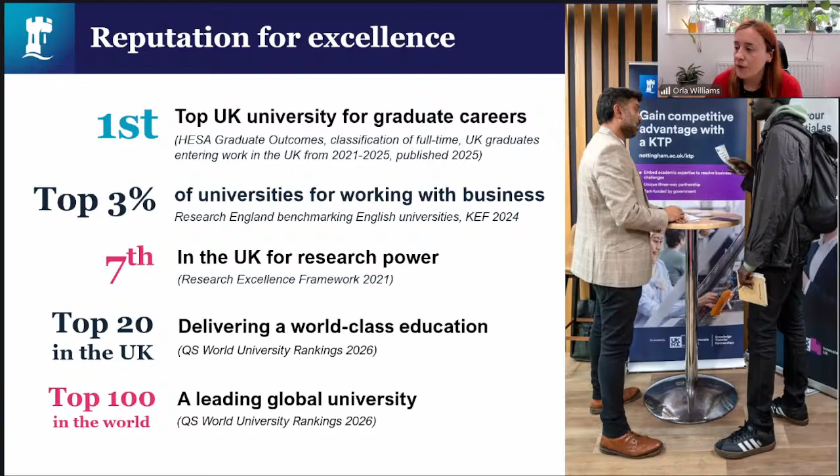We have quite an extensive history of milling at the University of Nottingham. This primarily comes from coal research. Nottingham is a very coal area, we had a lot of coal-fired power stations in this region, and there were a lot of coal mines in this area. This meant the university did a lot of coal research since its founding in 1948. However, since coal is no longer being used in the UK for power generation and our steel industry has declined, we are now focusing more on researching low carbon fuels and moving away from coal dependent technologies.

We have extensive milling facilities for material processing at the Faculty of Engineering, and we recently received a large donation of milling equipment from Uniper. Uniper is the company that owned Ratcliffe-on-Soar coal-fired power station, which you can see here on the right.

This was the last coal-fired power station that operated in the UK, and it shut in 2024. However, there are other coal-fired power stations, for instance Drax and Lynemouth, which have been converted to use biomass. A lot of the research we've done over the last 25 years has been looking at moving from coal to biomass, understanding what that change in material means for reusing existing equipment, what modifications need to be done, and how those challenges can be overcome.

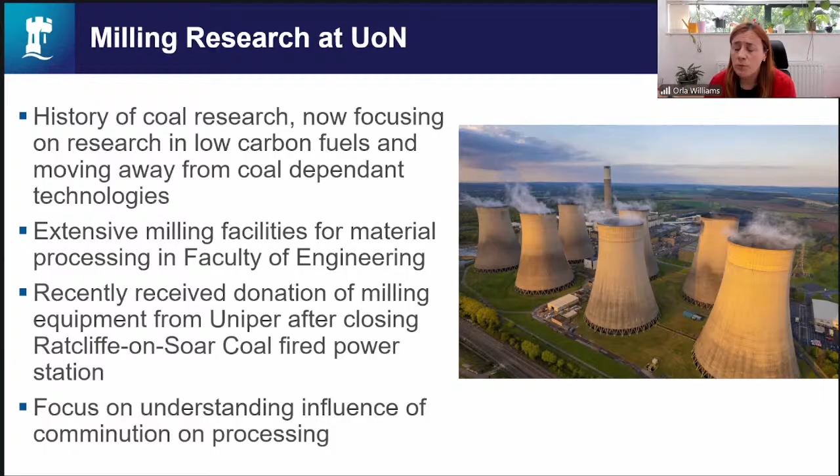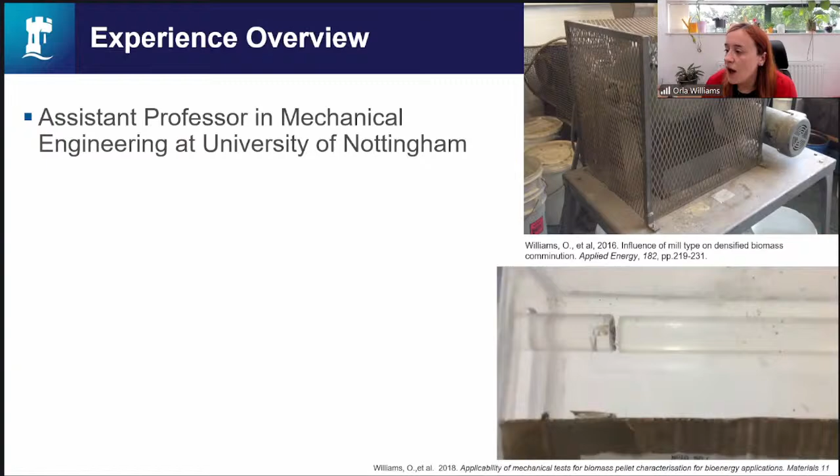So we focus on understanding the influence of comminution on different processing techniques. My own personal experience - I'm an assistant professor in mechanical engineering at the University of Nottingham, but I work closely with our chemical engineering department. My PhD itself was on biomass milling for power generation, trying to understand how different types of biomass break down in different types of mill.

As you can see from the video on the bottom right, this is from something called a split Hopkinson bar, which is used to calculate the dynamic stress and strain of materials. What you have is basically a gun launched by compressed air, and we have perspex bars with strain gauges on either side that measure the impact of the material - the strain, the transfer of energy - and from that you can work out stress, strain, and Young's modulus.

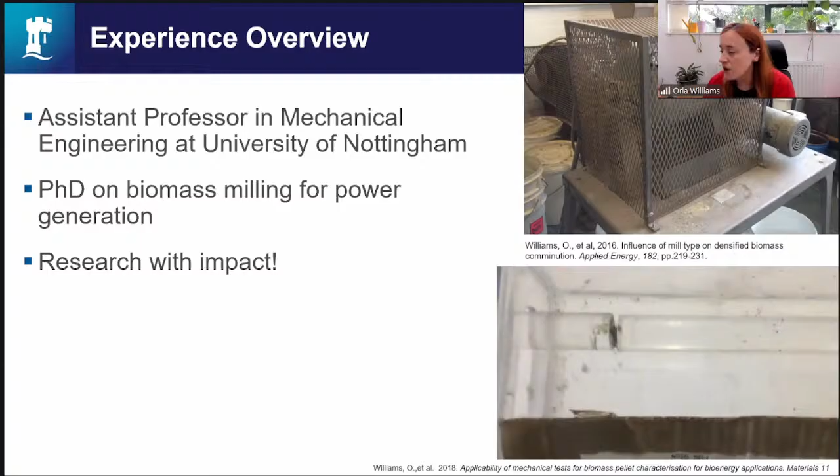This gives us information on what happens during impact collisions at high speed, which relates towards milling. So we also do extensive work with industry on milling to address their issues. We work a lot with power generators to understand new fuels they're looking at and how they behave compared to what they currently use, focusing on greater understanding of milling processes and linking those back to material properties.

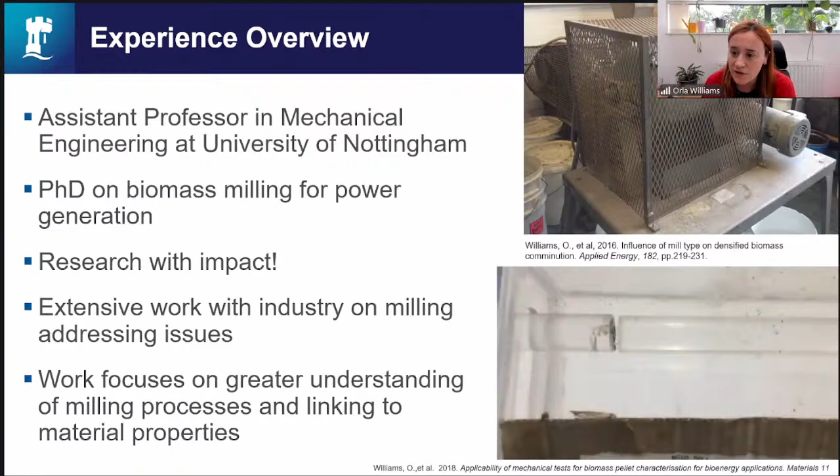So current milling processes are very, very energy intensive. On the right we have two mills from coal-fired power stations in the UK. What we have is a tube and ball mill here at the top - that's probably the closest to the planetary ball mills we see a lot in mechanochemistry. And at the bottom we have what's called a ring and roller mill, a ball and race, and that's from Drax.

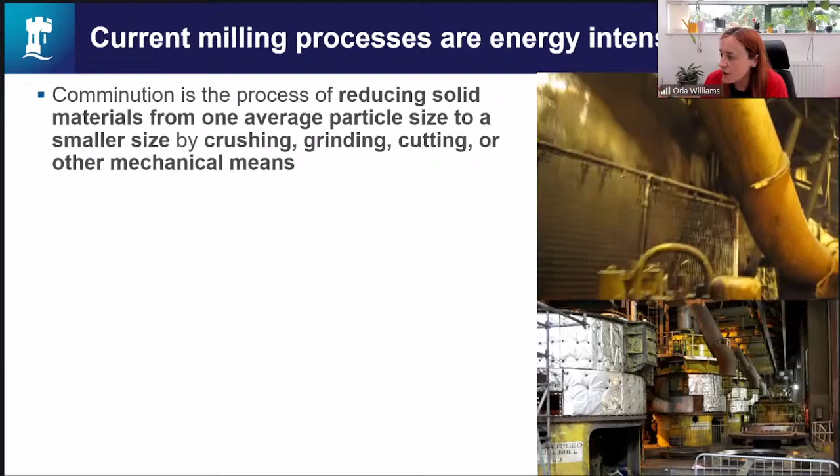Now these are continuous throughput mills at scale. They can get through a huge amount of tonnage per day of different materials - they're continuously inputting and outputting the materials. The process they're trying to do is comminution, which is reducing solid materials from one average size to a smaller size by crushing, grinding, cutting, or other mechanical means.

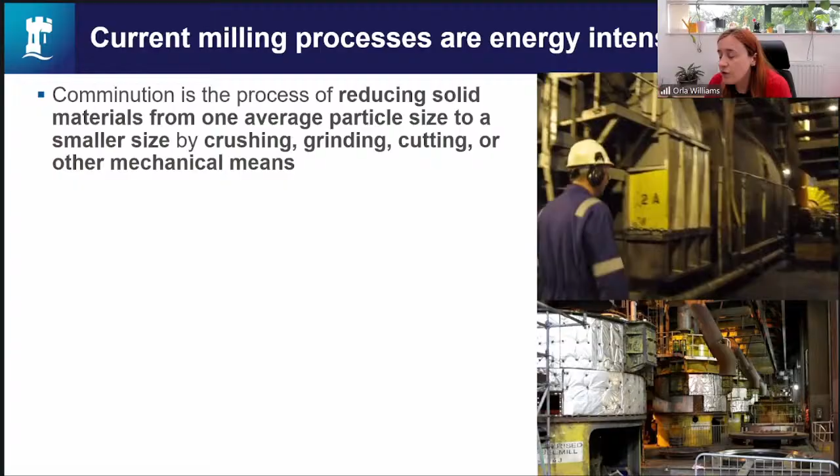Milling accounts for 2 to 3% of total worldwide energy consumption - I think it's currently one of the biggest for any one process in the world, only recently overtaken by data centers for AI. But comminution accounts for around 50 to 70% of the energy used in material and mineral processing. When looking at full-scale operations, minimizing this milling energy has a real impact on the economic viability of using different fuels.

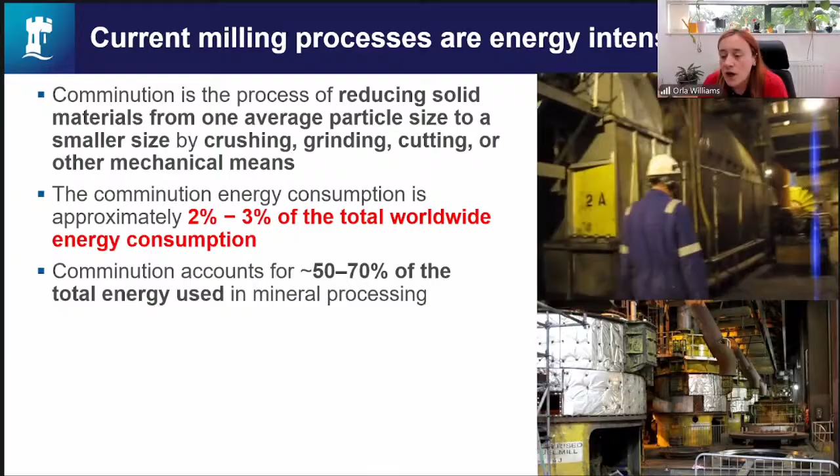If the energy you consume is 2 or 3% of the energy within the material, then it's a poor option. So if there are ways of reducing that energy consumption, it means you can make that material more economically viable for different applications.

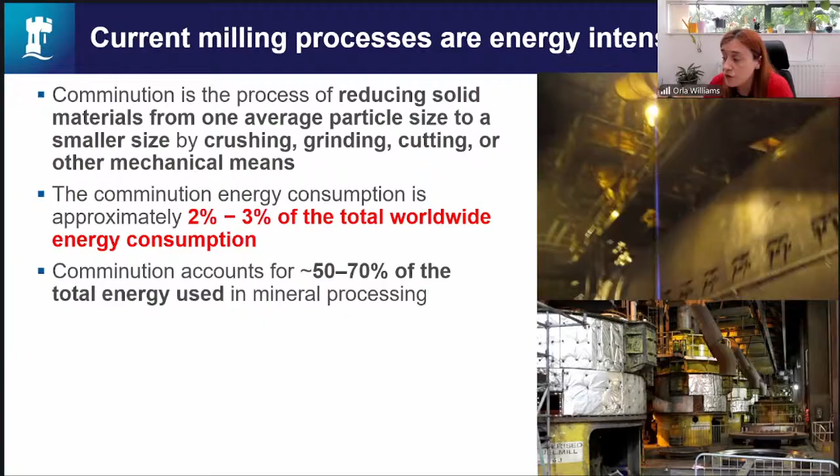To give you an idea about bioenergy in particular, it provided around 15% of all the UK's electricity in 2024. This primarily comes from Drax, which is the largest power station in Europe. They have, I think, 600 megawatt boilers, and 4 of them have been converted to run at 100% biomass - that's 2 gigawatts of power.

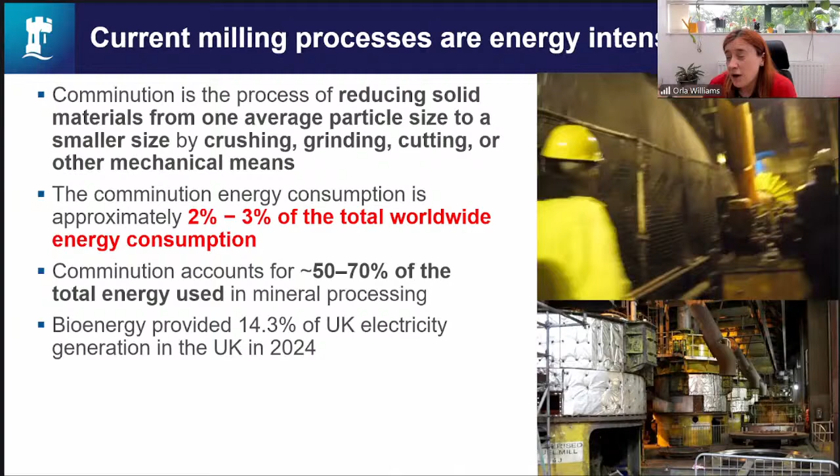They use over 8 million tons of wood pellets a year in pulverized fuel combustion, so that 8 million tons of wood all needs to be milled into a fine powder for combustion. This is around 20% of the global wood pellet supply going to one power station. They're actually one of the world's largest producers of pellets now, as well as the largest consumers. But you can see, optimizing this process is vital to the viability of these plants.

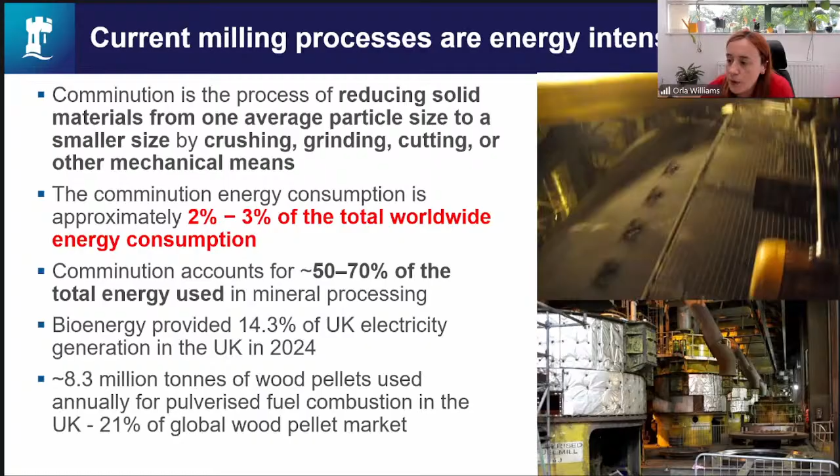So what happens in these mills? This is what's called a ring and roller mill, from West Burton Power Station, which used different types of biomass and coal. You can see here what we have is the rollers at the base, and there's like a flat plate here, and these turn and roll around. We also have incoming air at the bottom that will lift the particles up through the mill and out.

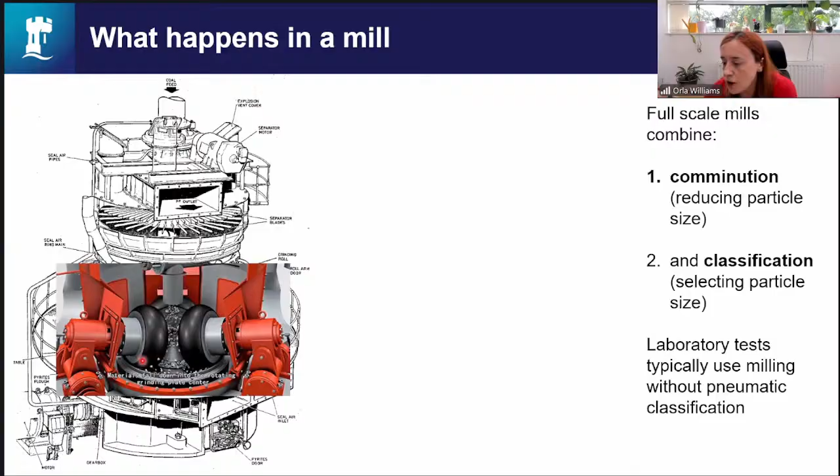So we can see a little animation of it here. We have the actual coal or your material falling into the mill. It's too heavy to be raised at the moment, so it goes under the roller, it gets crushed and reduced in size. Once it's the right size, the air will use, based on Archimedes' principle of buoyancy, lift it up through this. This is actually a dynamic classifier, and that will take it away to the boilers.

Now, full-scale mills, for these purposes, combine two processes, not just milling, but also classification. So they reduce the particle size, but then they also select the particle size when it's the right size to leave the mill. Laboratory tests that characterize these mills usually only look at the milling part with a set particle size. They don't often include the pneumatic classification, and this can lead to misleading results, particularly for new materials.

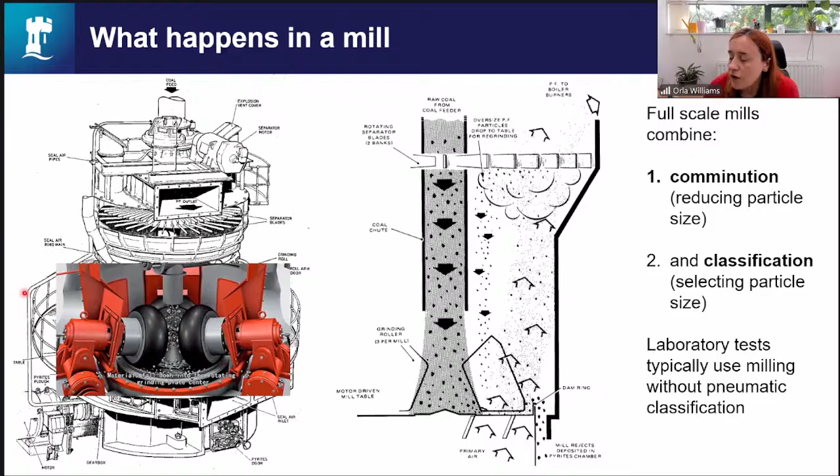So one of the main issues seen in full-scale mills is something called mill choking. Now, this is your typical materials that are used for bioenergy. We've got olive cake up here, a residue from olive oil pressing. There are large amounts of this waste in Africa, the Middle East, and in Spain and Greece. This is one of the ones that was most used for combustion in the UK over the last 20 years.

We then have two here, which are sort of thermally treated biomasses. The top one is microwave torrefied, meaning it's been cooked in an inert atmosphere to remove the volatiles. That's called almost like a coalification of the biomass, where you're trying to make its properties more like coal, one reason being to improve its grindability. This one at the bottom is a steam exploded pellet from a company called Zilkha, an American company. I don't believe they're still going, but this was of a lot of interest to power generators about 15 years ago.

On the left here we have coal. This is called La Loma, a low NOx coal from Colombia. This was favored in Western Europe because there was a big drive in the 90s to reduce nitrogen oxide emissions from power stations due to acid rain. A side effect of reducing NOx was also reducing carbon emissions, so that's why our carbon emissions reduced a lot, was actually to reduce the NOx. So this is very popular, but it's very expensive. But it is a very good grinding coal.

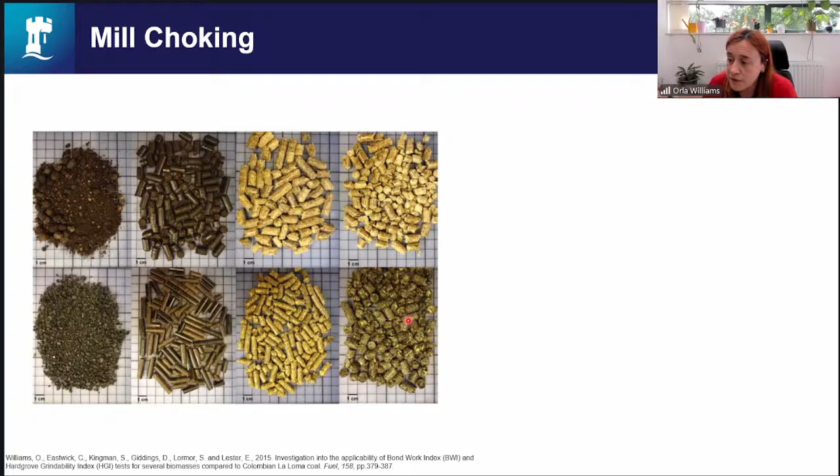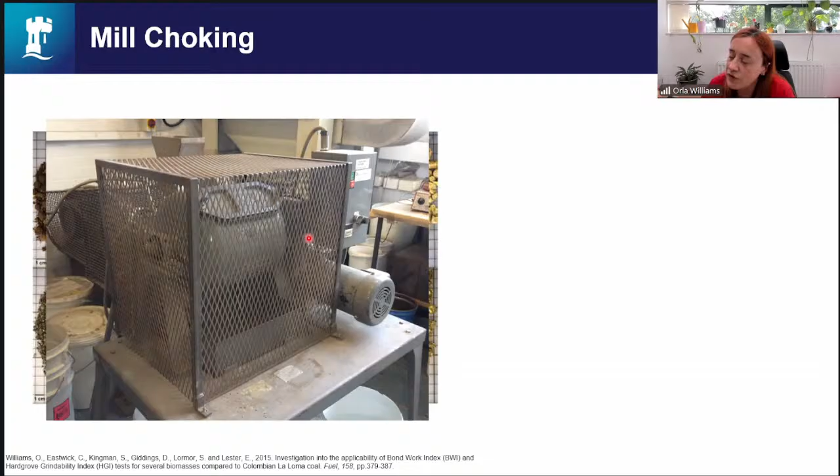But the test basically works by looking at how many revolutions it takes to go from your pre-milled size to a target particle size. What you should see is for a good material, it will break down quite easily and you'll get settled to a constant revolution quite quickly. This is what happens with the La Loma coal that we did.

So you can see here we've got two axes. We've got the mass retained on the sieves, we've got the revolution counts, and then we've got the blue line, which is the actual revolutions for each run that were calculated to be needed to get to the target size. We then have the purple line, the mass above 1 millimeter. We have the green line, the mass between 90 microns and 1 millimeter, and then the red line is the mass below 90 microns.

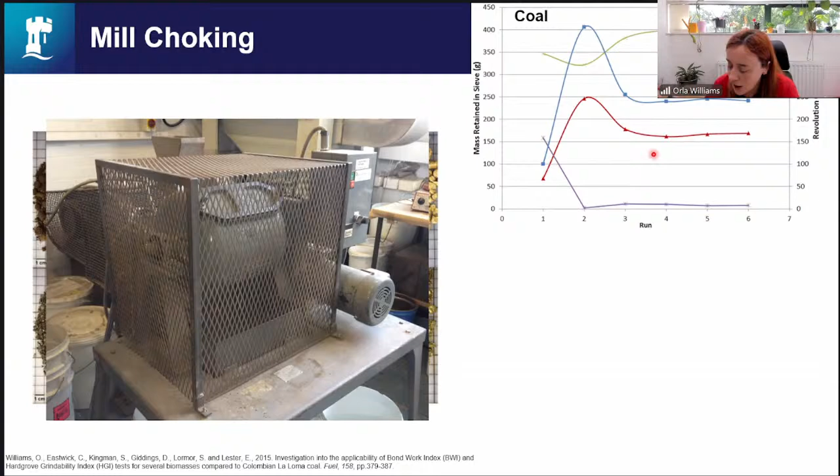So the target size we had for this test for coal was 90 microns. You could see after the first run, by run 3, we can see it settling into a pattern of around 250 revolutions, and we've got a significant amount of the material in the sub 90 micron category. However, when we look at the wood pellets, we see a different pattern emerging.

We can see that the rev count continues to increase, and it increases sharply. It's already at 2,000 revolutions by run 3 in comparison to 250 for the coal. And it keeps rising upwards on this line.

It takes about half an hour to run 2,000 revolutions, by the way, in this mill. So you can see it's running for quite a long period.

If you think about relating this to a full-scale mill, that means material isn't leaving the mill quickly. So you're adding more and more material into the mill, but it's got a very low output compared to the input. This is called mill choking. The mill is filling up because the material isn't leaving, as it's not reducing in size enough.

The target we had for this was 1 millimeter. It wasn't 90 microns, it was 1 millimeter, so an order of magnitude larger than what we had for the coal. However, as you can see, it's not really reducing in size very much. It's struggling to get there. So this shows that there's something happening in the mill that's stopping that process.

It's stopping the material reducing to the size it needs, and to have the input and output mass flow rates be the same. So this is obviously relevant to when you're scaling up any lab scale milling.

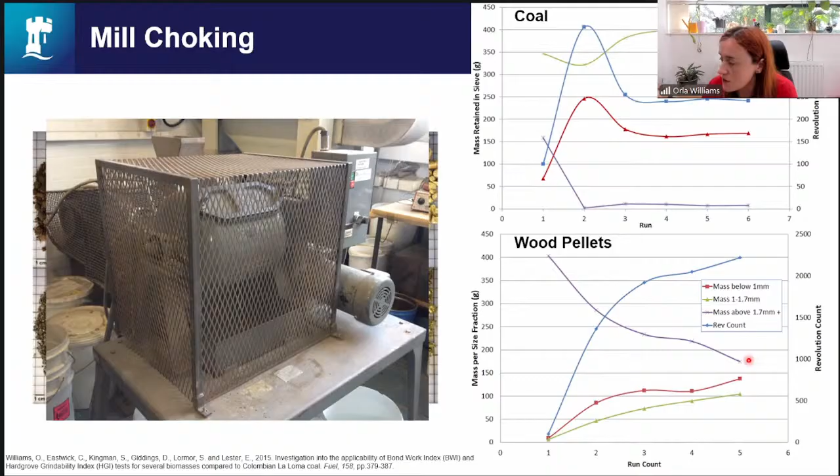So for the biomass pellets, we decided to look more into what was actually happening in terms of the material itself. When we look at combustion, the residence time in a boiler is set by the Stokes number, and anyone who does CFD will have heard of Navier-Stokes.

The particle size is selected by something called the Stokes number, which is given here. This is called the cut size, and it relates to the right size to give you the right residence time within the boiler, so your classifier is set up to give you the right residence time. It's a relationship that relates density to diameter, to the speed of its flowing, and some other material characteristics.

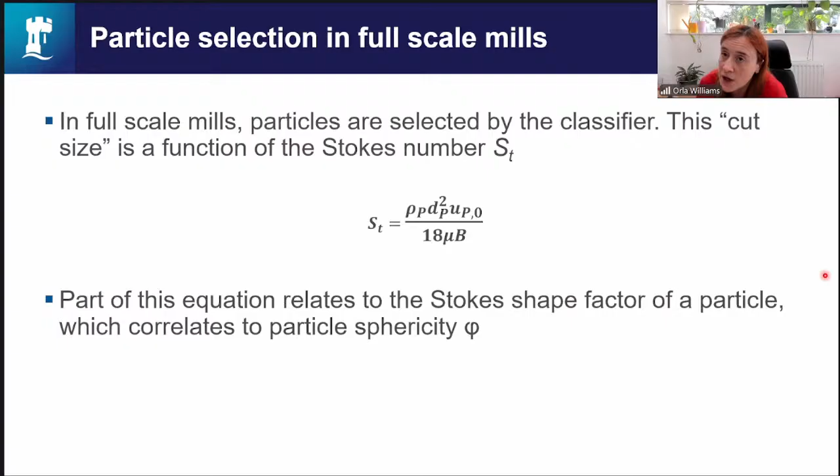Part of this equation relates to something called the shape factor of a particle. So it's not just about its size and its density, it's also about its particle sphericity. This is its three-dimensional sphericity, not its two-dimensional sphericity, which can be quite tricky to measure.

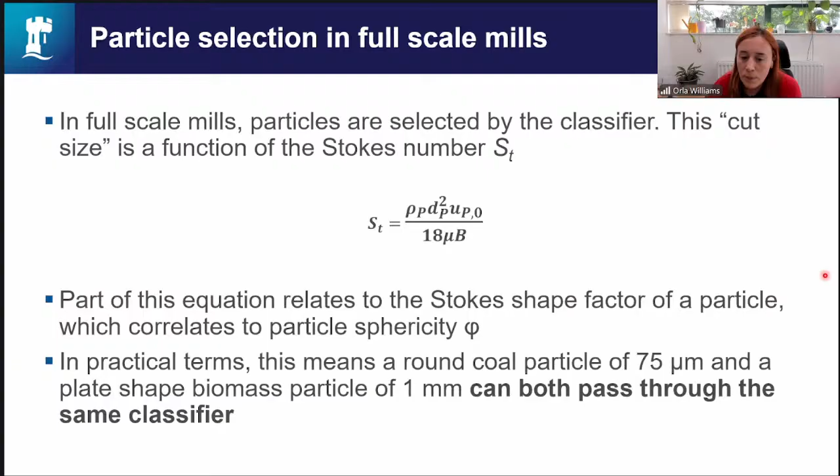But what we see in mill choking is even when the particle size is set to 1 millimeter, the particles are struggling to get out of the mill.

So all materials have something known as a critical particle size for comminution by brittle fracture. When you're in your PhD, you might get asked, 'What's the most important paper you came across during your PhD?' For me, it was this one here by Kendall in 1979, because once you've gone past this critical particle size, materials go from being brittle, where you can use impact to overcome brittle fractures, to ductile.

And therefore, those impact fracture mechanisms no longer work effectively. You don't have a fracture mechanism system to take advantage of to break down the material easily.

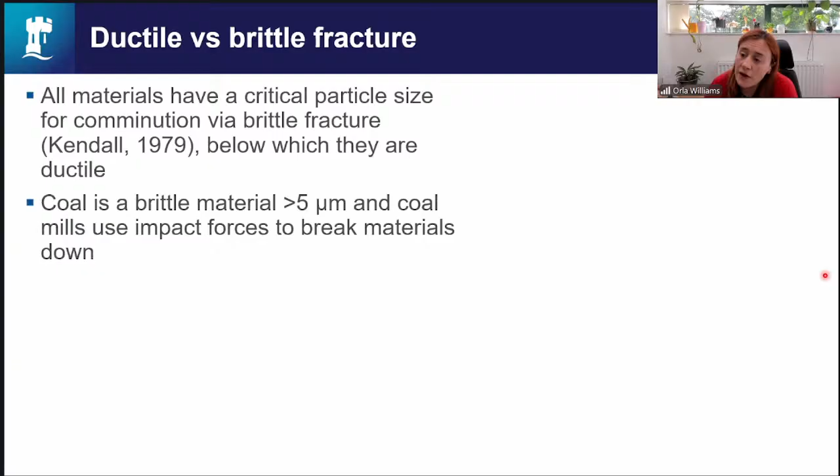Now, Kendall showed that for coal, this critical particle size was 5 microns. And given that the target for coal is that 70% of the coal should be below 75 microns, you are very far away from that brittle critical size.

However, for biomass, this has not been measured, and power generation generally uses a target of 80% of the biomass below 1 millimeter. However, we can see from our testing in the bond work index mill, the mills are struggling to reach that size. This implies that the critical particle size for biomass is above that target, between 1 to 2 millimeters.

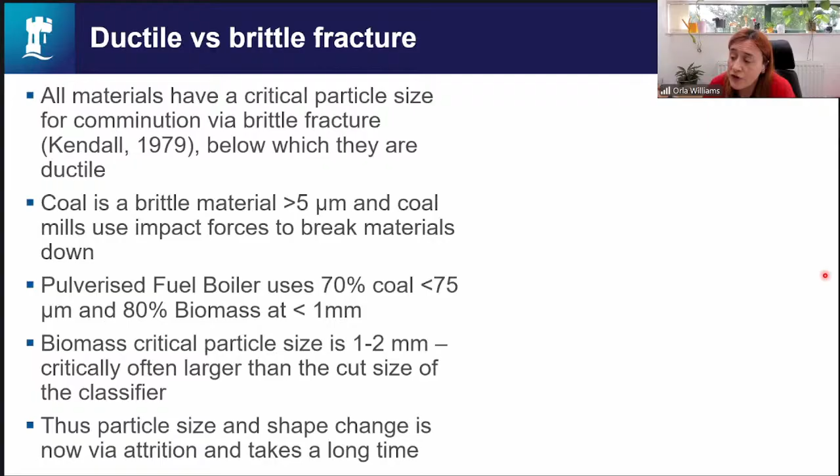So you're trying to get the mill to do something. It's a fracture mechanism type of mill, but it's trying to break down a material that is not going to do that. That means you're continuously using impact, but not getting that breakdown of the material. So the particle size and shape change now only happens through attrition rather than impact and brittle fracture, and this takes a long time to happen.

Because if you think about it, if you have a particle and you're using attrition or abrasion to reduce it, what's happening is you're just chipping off little bits on the edge. That makes the particle more and more round, which helps with the shape factor, but it takes a long time to achieve. Whereas for coal, you have this fracturing - you hit it and instantly get this sort of explosive breakdown.

So this is where you have this difference between compression fracture and shear fracture coming into play. And it's very much horses for courses - is the milling method you're using, if you're trying to get particle breakdown, the right one, the most effective one for that material? Because compression and impact is best for brittle materials like coal, whereas shear forces, so cutting and hammer mills, are better for biomass because they behave like ductile materials.

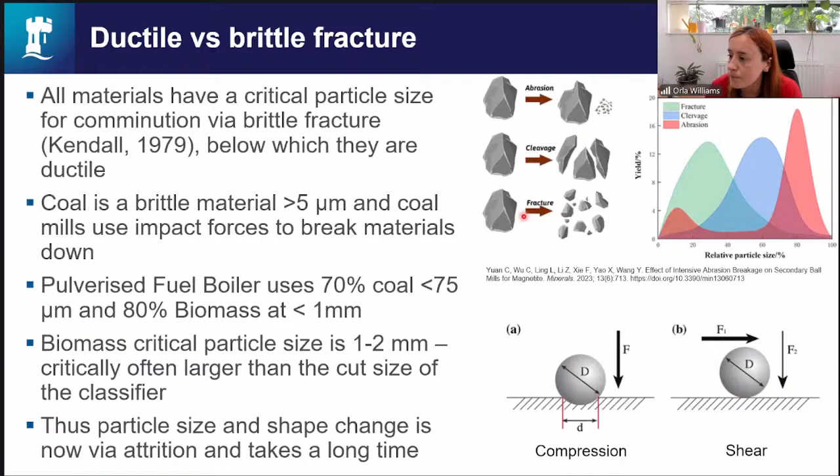So to go a little bit further into this, one of the things power generators and industry really like is metrics. They like if you can consolidate everything into a number that you can then rank things against. They obviously like to know the specifics behind that, but it really helps them with their decision making if you can quantify your work into simple communicatable ideas.

So to help with this, one of the things we started to look at is the milling theory behind mills and linking this energy and the particle size reduction together. There are 3 main milling work indices, and they are all derived from the general comminution energy equation, which was proposed by Walker back in 1937. And what we have here...

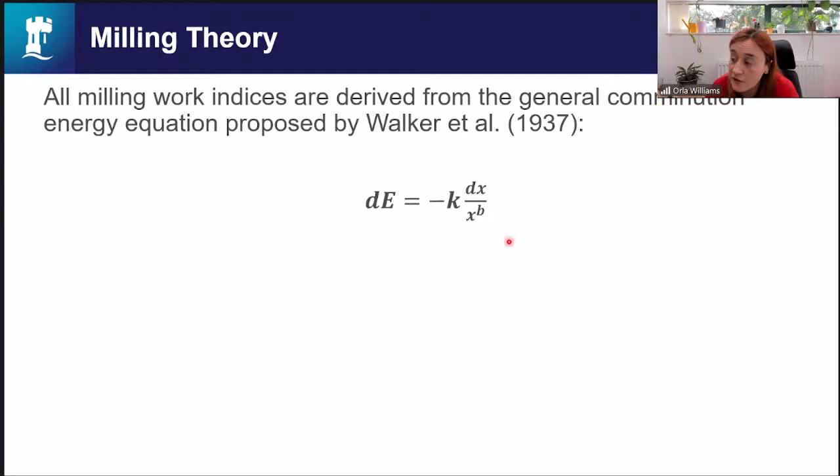...is we have the specific effective energy, so that's in kilowatt hours per ton - the energy it took to mill that material for the amount you put in. We have K, which is a material constant. We have dx, which is change in particle size, and your particle size to the power of b. Now b is related to the mill that you have, and there are 3 different b values, and they go with these 3 laws of milling.

So we have Kick's law, where the b value is 1, and this shows that energy is proportional to the log of the size reduction ratio. This is best fitted to coarse crushing, so jaw crushers, roll crushers and so forth. We then have Rittinger's law from 1867, which has been around for a while, and that relates energy to the increase in surface area. That's most applicable to vertical spindle mills and hammer mills and relates to fine grinding.

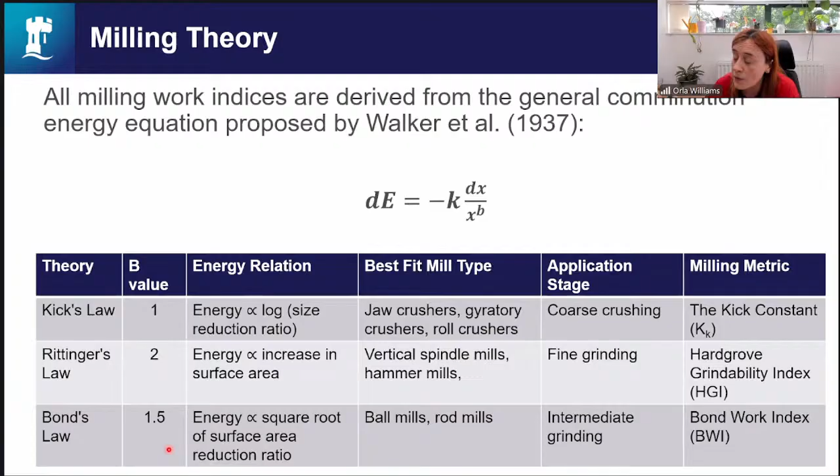This Hardgrove grindability index is another standard test that's used for coal. Then we have Bond's work index, which has a b value of 1.5, and that shows the energy is proportional to the square root of the surface area reduction ratio. This applies mainly to tube and ball mills and rod mills, so this is intermediate grinding. But as I've shown, these type of mills are also used a lot in power stations for breaking down coal.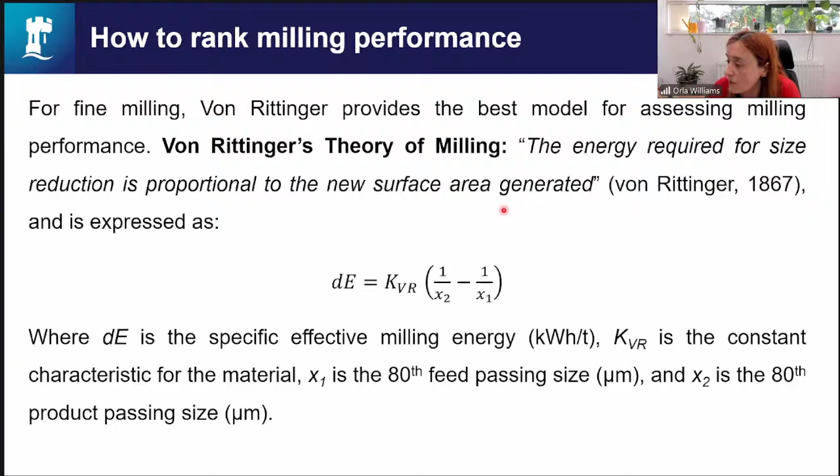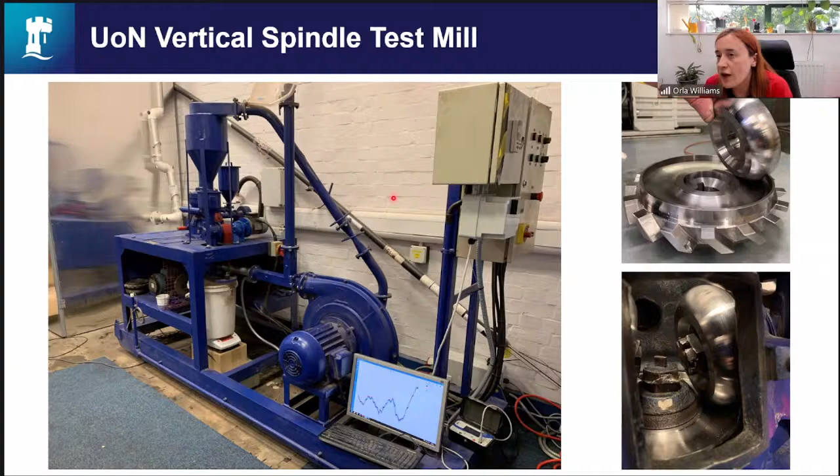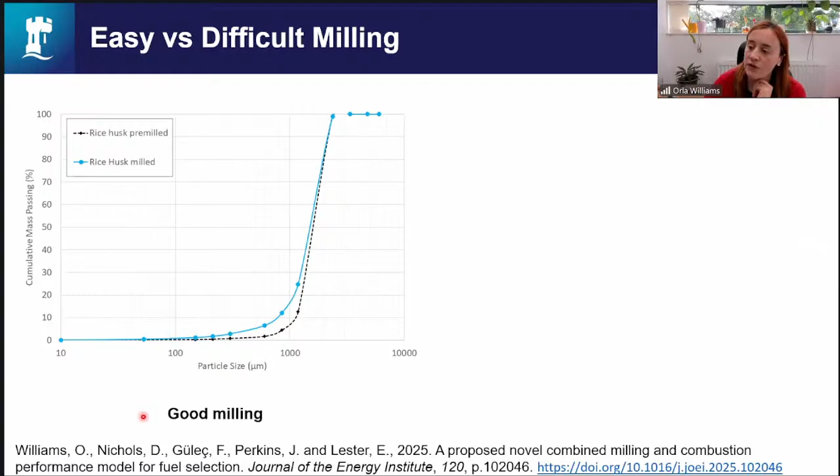So this is a replica, as I mentioned, of Drax. We did a lot of work with Drax looking at different types of fuels they might be interested in. For instance, they were interested in rice husk as an agricultural residue. Rice husk was great because you put it into the mill and it just came straight out. This shows the benefit of having an input feed that's the right size, shape and density - it just goes straight through the mill. You basically don't need to mill this, and it shows it there.

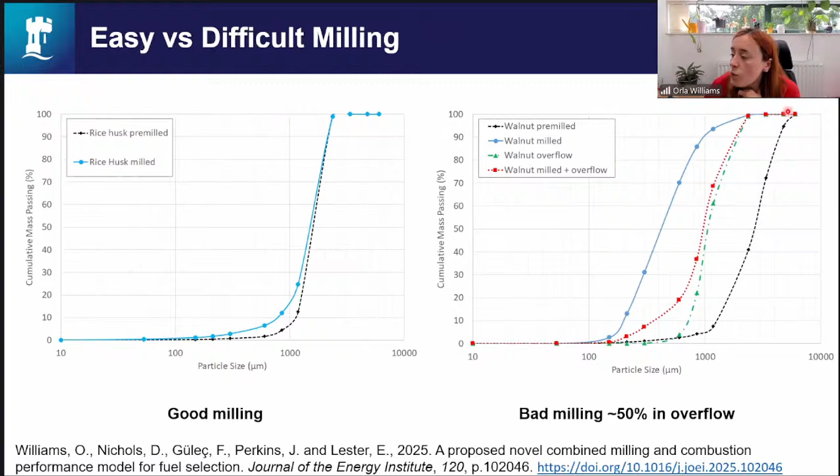So we use this for ranking our different types of materials, and I'll come to that in a second. But if we look at the same material in different types of mills, we can see this issue of mill choking a bit as well, and we can see the attrition actually taking effect.

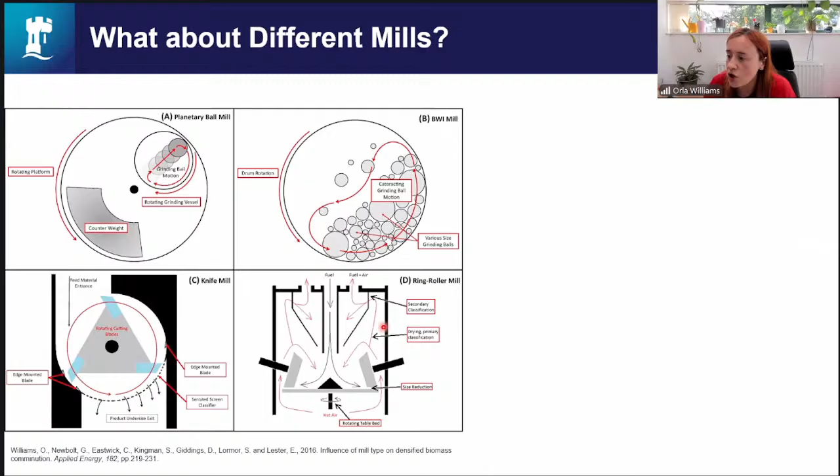When we do them, what we did was we used a piece of software from Retsch called a Camsizer, which is a particle imaging software. It's non-destructive, so you can pass your particles through. It will take images with a high-speed camera, and it looks at the particle size and shape, and it actually gives you the 3-dimensional sphericity.

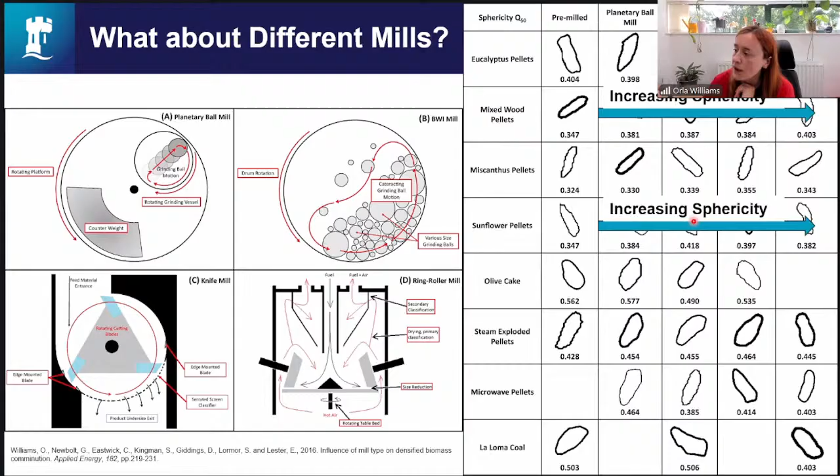So when we look at using von Rittinger, we can take the energy and the particle size reduction ratio to give us a specific von Rittinger rating for each material. What you see is that it gives you a combined metric. So some materials might not have a huge energy consumption, like the walnut, but its particle size reduction wasn't very good either, so that influences its ranking.

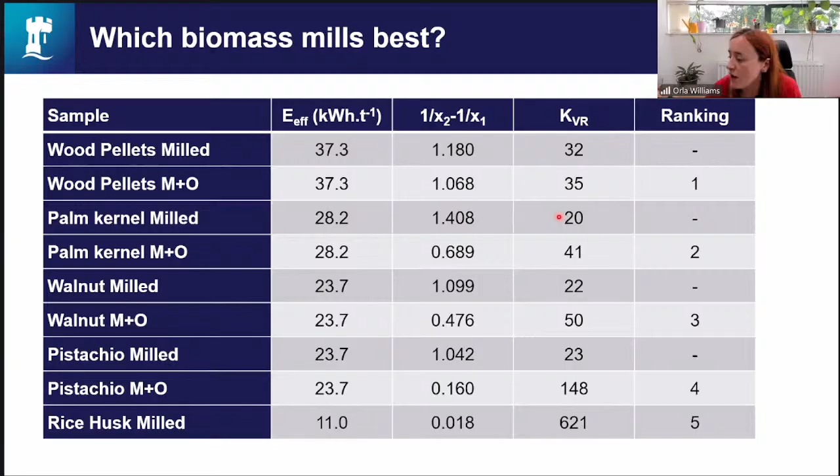So we can use this ranking to actually assess different materials within that ring and roller mill and see how well they compare against each other. Industry has conducted tests at full scale for the same materials and found that these results correlate. So what we see in behavior here, if it's good in this mill, it will be good at full scale, and if it's not good in this one, it won't be at full scale. This gives industry a metric tool to compare different materials, but we also provide the information behind that so they can understand why they're different.

We've also been looking quite a bit at coal and biomass. As I mentioned, we used to be a coal-intensive research institution. However, a lot of our research is now helping other countries that are only starting on that transition, to understand the issues they have. For instance, we've been working with Australia, Colombia, and India on looking at co-milling, where you have say 90% coal and add 10% biomass. This can often lead to issues because you've got two very different materials and you're trying to mill them at the same time, so this is often a starting point for power stations to look at whether they can convert their systems to biomass.

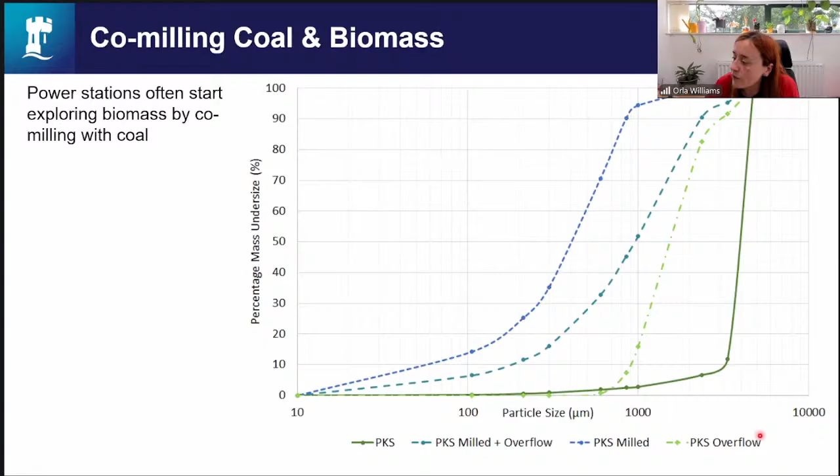This is the milling profile for palm kernel. You can see we have the palm kernel original here, it's called PKS, and it's very coarse. We then have the milled, which is nice and fine, but we had a significant amount of overflow, which gives us this composite one in the middle. Now it doesn't mill well on its own, palm kernel shell. Every time it would just choke up the mill and it wasn't really liking it.

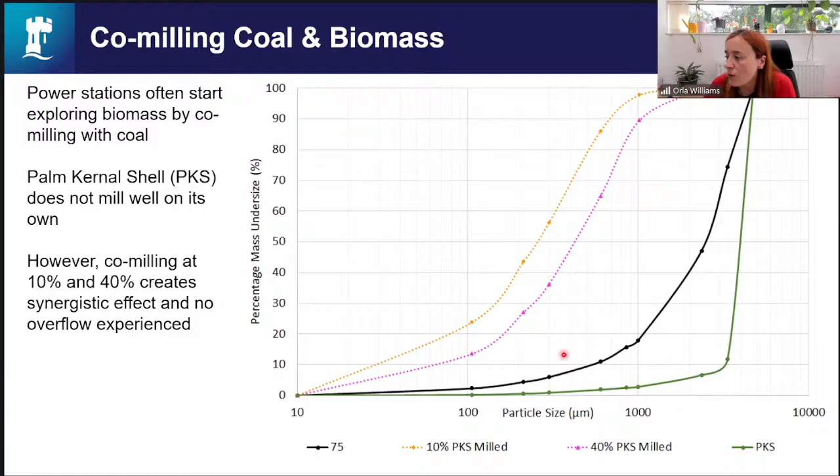However, we did co-milling tests at 10 and 40%, and we found that there was a synergistic effect, and that if you milled the palm kernel with the coal, the palm kernel didn't choke anymore, you always got complete milling. So we could see that combining different materials with different properties, one being brittle, one being ductile, can actually improve the overall milling. Now the particle size distribution you get out is coarser than what you would get just with the coal, so that obviously has a knock-on effect for combustion. But there are benefits for co-milling different types of materials together to overcome some of these choking issues.

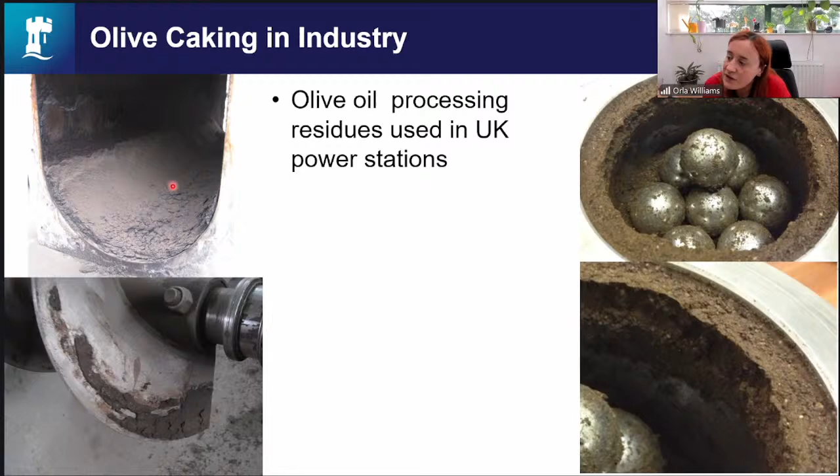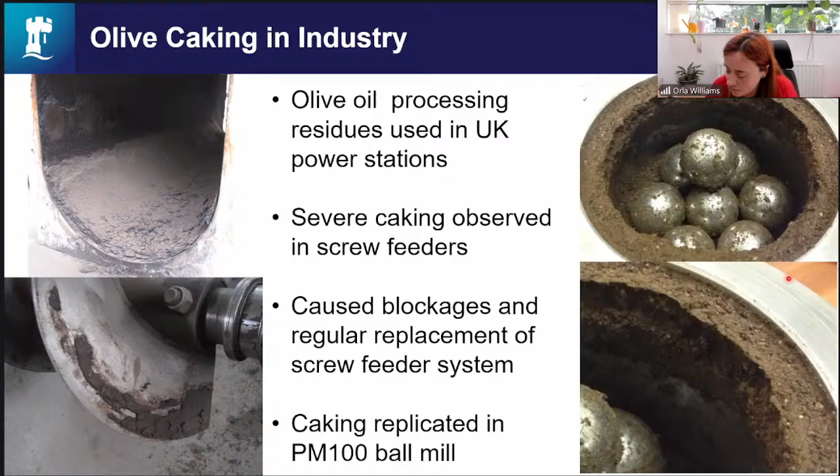They observed this severe caking within the screw feeds and asked us if we could replicate it in the lab. So we took some of the olive cake and put it into a PM100 ball mill, and we replicated the sticky cake on the side. It was actually a very solid cake, and you had to chip it off with quite some force. It was stuck to all the balls as well.

When we looked at the particle size distribution of the olive waste, it's composed of 3 parts: agglomerations, pips and pellets above 3.35 millimeters, then a midsection which is the pips or olive stones, and below 1 millimeter is the fleshy outer layer, the pulp, which is fine material. So you have these 3 different parts to the material.

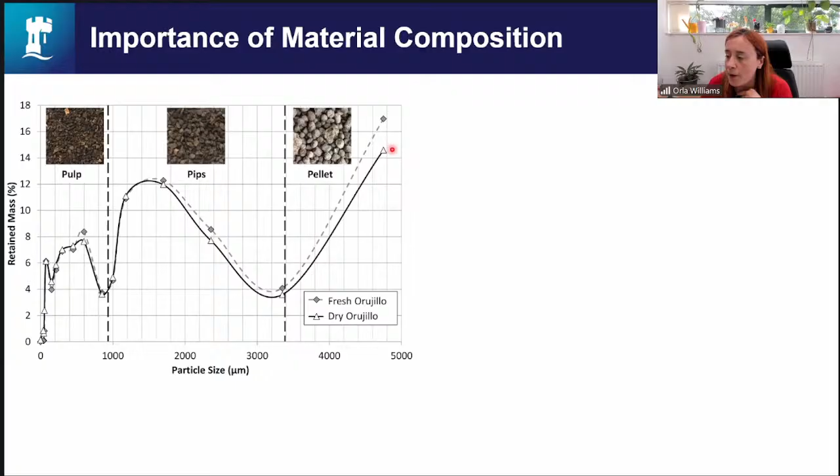We wanted to see what was happening with each of them, so we looked at the influence of moisture. We dried it and also ran it as received, and found it was only caking when it was wet. So we thought, what kind of issues cause stickiness within the food industry? Because at the end of the day, olives are a food.

We decided to try using differential scanning calorimetry, DSC, to see what was happening around the glass transition zone. We put the material in and found there was a glass transition step happening between 80 to 100 degrees, and this caking was being brought on by that step.

You could actually see the heat being generated in the mill through thermal imaging. We can see a lower heat generation within the mill when using the wet material than when you have it dry.

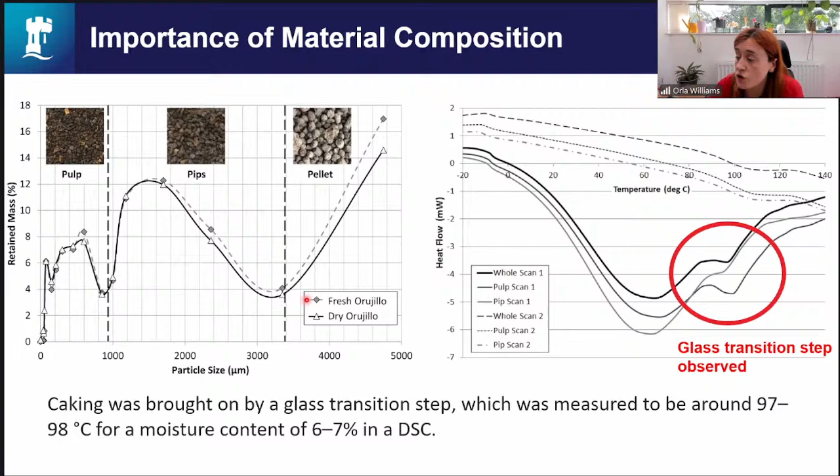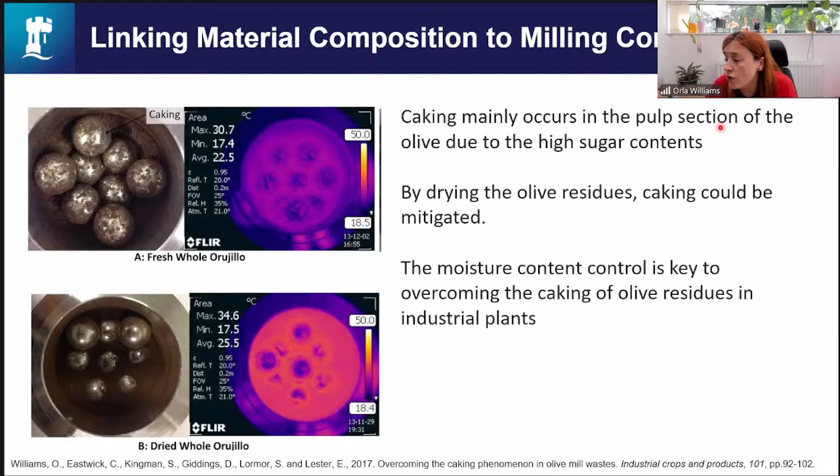We also milled each section of the olive separately - the pulp, the pips, and the pellets - under the same conditions, and also milled them as a whole. We found that the caking was only really happening in the pulp section of the olives, due to the high sugar content, which is actually variable by season. But by drying these olive residues, you could remove this caking issue. So moisture content was key to overcoming the caking of olive residues in the industrial plants.

The relevance to mechanochemistry is that understanding material properties at a macro scale can help us understand what's happening when we see these caking issues, and how it relates to milling conditions, which can show us why these issues occur.

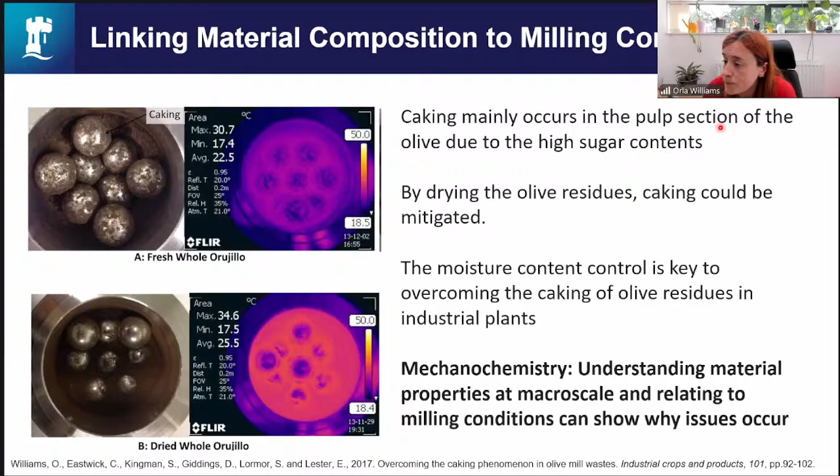Some of the recent work I've been working on in relation to mechanochemistry has been looking at opportunities for extracting high-value products from seaweed. The UK used to have quite a buoyant seaweed industry, primarily for potash production, but that has reduced over the last century, and it's now mainly used for food processing.

Seaweed is about 80-90% moisture, and the current issue is you get the seaweed out of the sea and it starts to rot pretty quickly, so they can only collect it at certain times of the year. They get a large volume, then have to dry it, which is energy intensive, and then shred it before they can process it. So the research drivers for this work are basically: can you combine those processing steps of particle size reduction, removing water out of the system, and doing the extraction processes they want, all in one step?

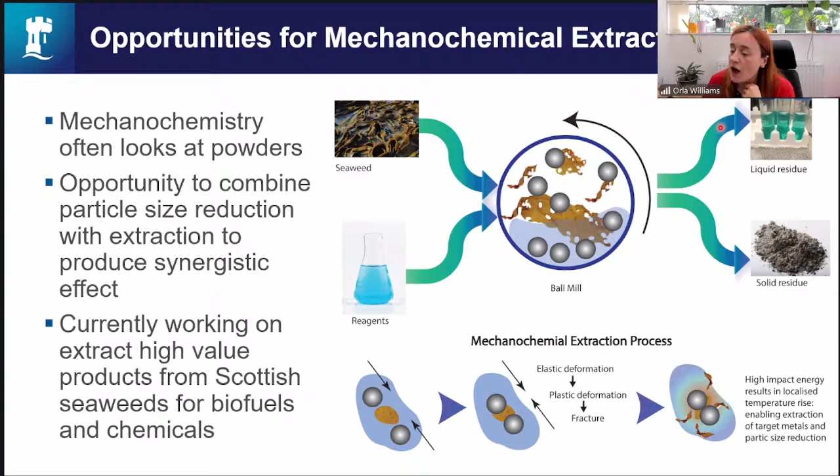So I'm currently working with a Scottish seaweed company looking at the extraction of biofuels and chemicals. And I had a short project with a student this year who did some exploratory work looking at the extraction.

of fucoidan, which is a sulfated polysaccharide found naturally within the cell walls of brown seaweed. This is used in dietary supplements, cosmetics, and functional foods, and it's heavily researched for its promising bioactive

and therapeutic properties. The one we looked at is a Scottish seaweed called bladderwrack, which you can see here. This is what it looks like, and you see this a lot in the UK coast.

And what we did is look at blended milling combined with hot water extraction. We used FTIR to show that fucoidan was not visible in the pre-milled material, but became more visible in the solid portion with milling and hot water processing. So this is the FTIR of the different processing steps.

And we can see that you don't see it at the start, but then as you actually mill it - and we found that actually heating the water as you milled it made the fucoidan more visible than if you just heat it and then mill it. So the student did a lot of exploratory work and saw that we could actually start seeing the fucoidan was there, whereas it wasn't before.

And the mechanical processing improves the exposure of the functional groups by disrupting the seaweed structure. We're currently doing more work into this, exploring how we can use solvents in situ to actually start extracting the fucoidan and other compounds into the liquid phase.

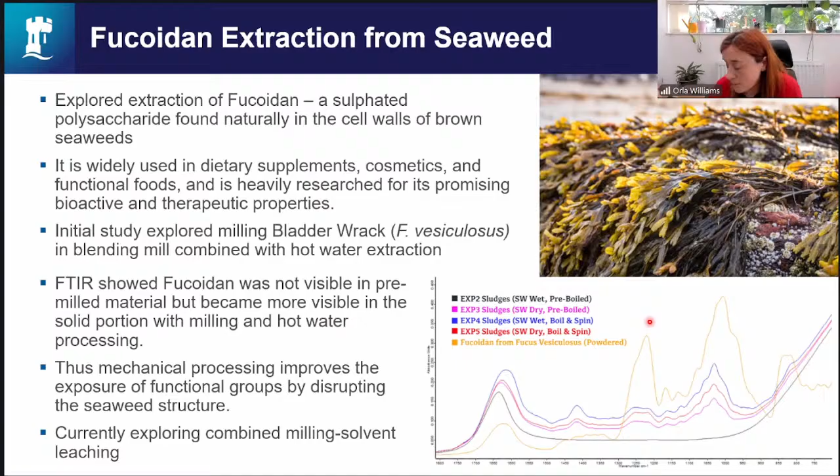So in summary, what I've learned from all my milling experience is that it's very much horses for courses. And when we're looking at any milling process, part of the consideration needs to be: is the milling process you're using - be that ball mills, hammer mills, or cutting mills - the right one for the material you're looking at?

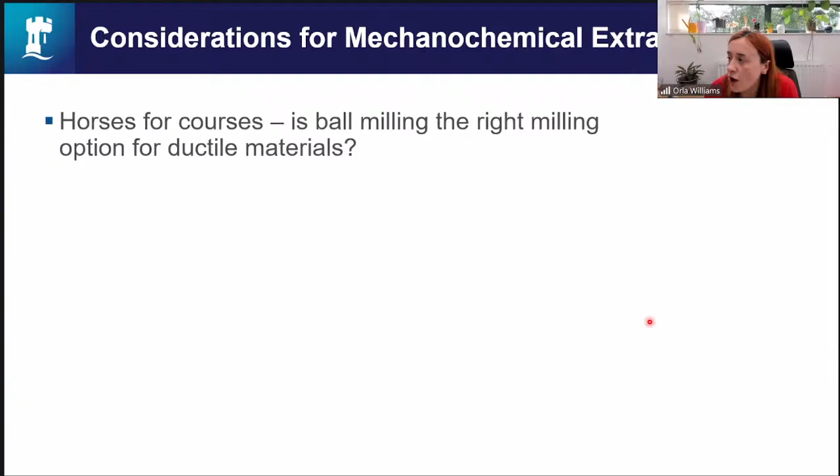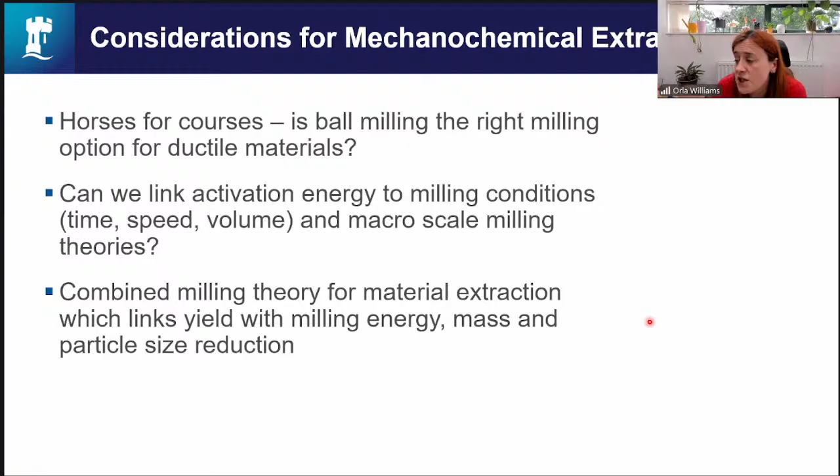Because how can you optimize it through the fracture mechanisms you're using? Is there potential to link activation energy to the milling conditions themselves - the time, the speed, the volume - and the macro scale milling theories that are used so much by industry? And based on this, is it possible to combine milling theory for material extraction, which links yield with milling energy, mass, and particle size reduction? These are all questions for myself as much as anything else.

And then, coming back to a theme of my talk, are the continuous flow issues. Problems have often been seen in other sectors, and there is a large opportunity for cross-collaboration here, but also learning from what's happening. As I mentioned, milling is 2 to 3% of the world's energy. It's a well-established technique done at scale everywhere.

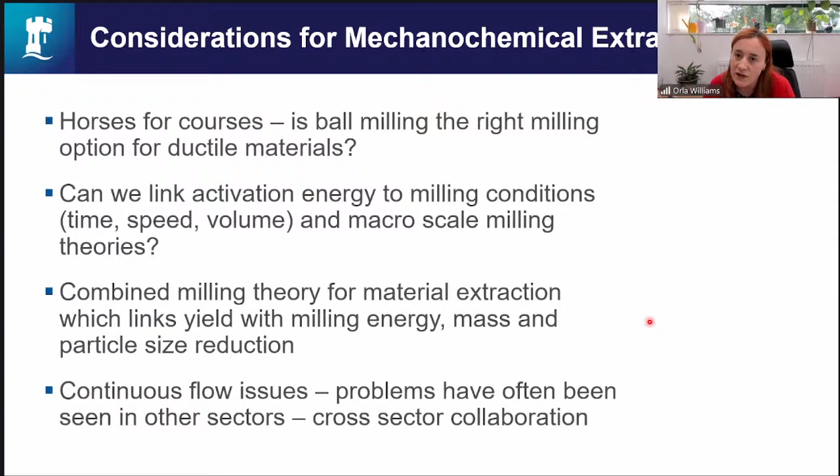So as we scale up mechanochemical reactions, are there systems already existing that could work for these different applications? Because there's a whole industry that uses milling, and it could rapidly advance from lab scale to full scale production by taking advantage of those systems already in place.